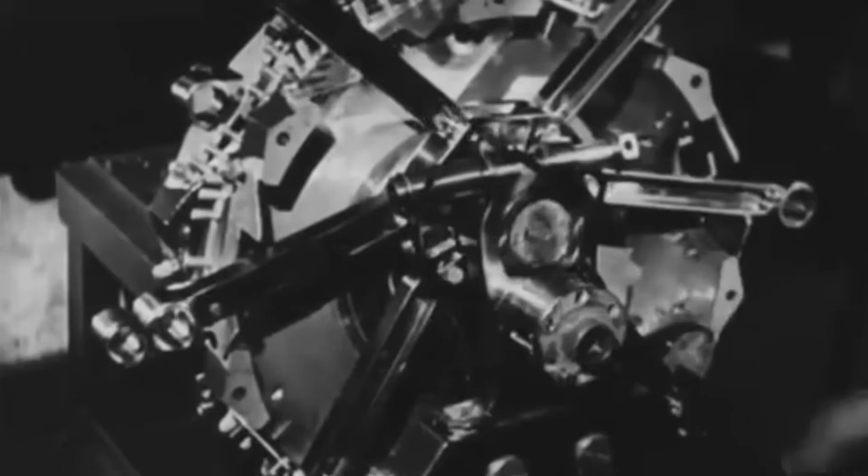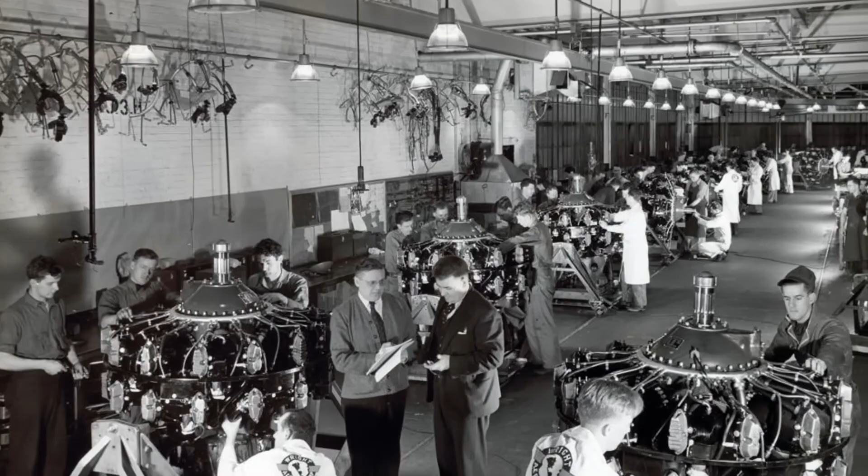In 1958, inside the massive Wright Aeronautical plant in Wood-Ridge, New Jersey, the most complex piston engine in American history was already obsolete. The Boeing 707 had just entered commercial service, tearing across the sky with Pratt & Whitney turbine engines. Down below, Wright was still casting and machining the R-3350 Duplex Cyclone, an 18-cylinder mechanical monster that had won a world war and powered the golden age of air travel.

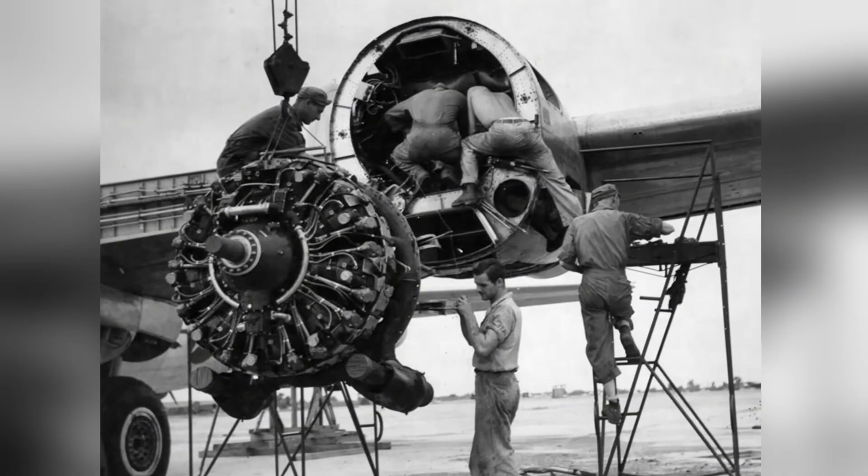A decade earlier, the roar of a Wright radial meant American strength. The R-3350 delivered thousands of horsepower, powering fleets of Lockheed Constellations and heavy bombers. But overnight, the rules of aviation changed. Airlines did not want thousands of moving parts, heavy oil consumption, and endless maintenance overhauls. They wanted the clean, smooth thrust of a jet.

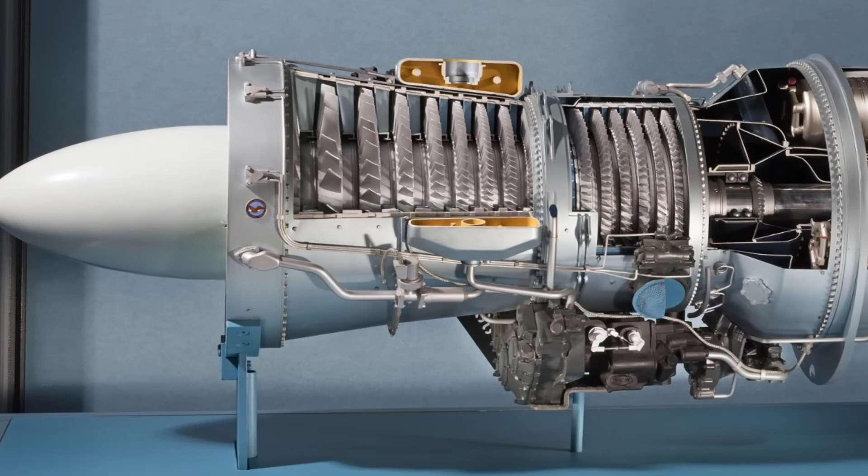Mechanics who had spent their lives mastering the grease and rhythm of radials suddenly inherited legacy equipment. The engine had not lost its power. It had simply lost the world that needed it. But the real story of Wright Aeronautical is not only the story of an engine line going quiet, it is the story of how an American empire pushed piston technology to its absolute breaking point, and what happened when the sky no longer needed that kind of power.

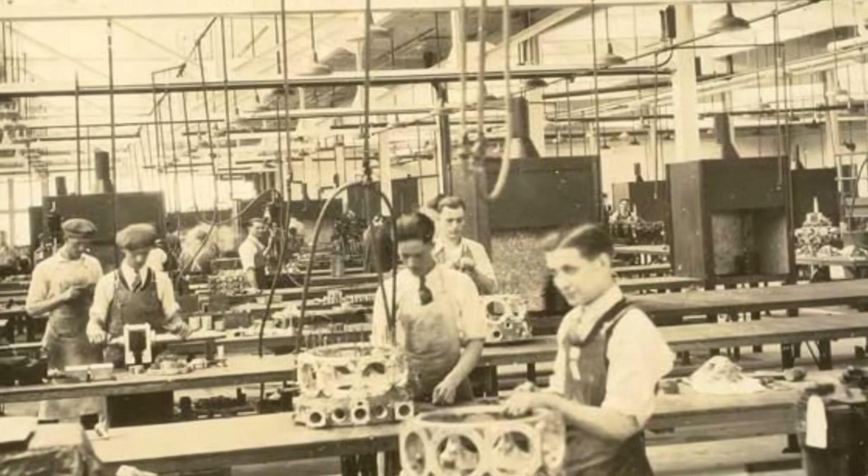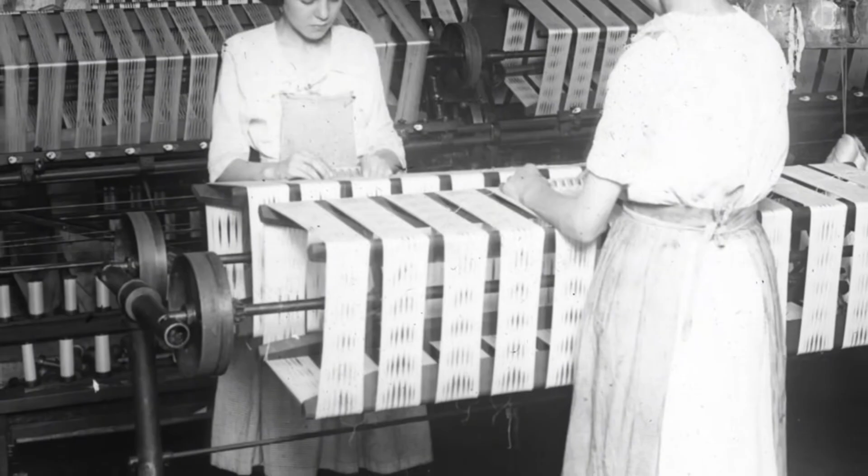Wright Aeronautical Corporation did not start as a giant. It began in the shadow of World War I, in a country that had not yet figured out what an airplane was actually for in peacetime. In the early 1920s, America did not have a commercial airline industry. It had the U.S. Airmail Service. The job was to move canvas bags of letters from New York to San Francisco. The pilots flew in open cockpits, navigating by following railroad tracks and bonfires lit in fields.

But the real enemy was not the weather or the dark. The real enemy was the engine. The standard aviation power plant of the era was the Liberty L-12. It was a massive, water-cooled V-12 engine that produced strong power, but required a fragile ecosystem to keep it alive. A water-cooled engine meant the aircraft had to carry a radiator, a water pump, and a network of rubber hoses and metal clamps. For an airmail pilot flying over the Allegheny Mountains in winter, water froze.

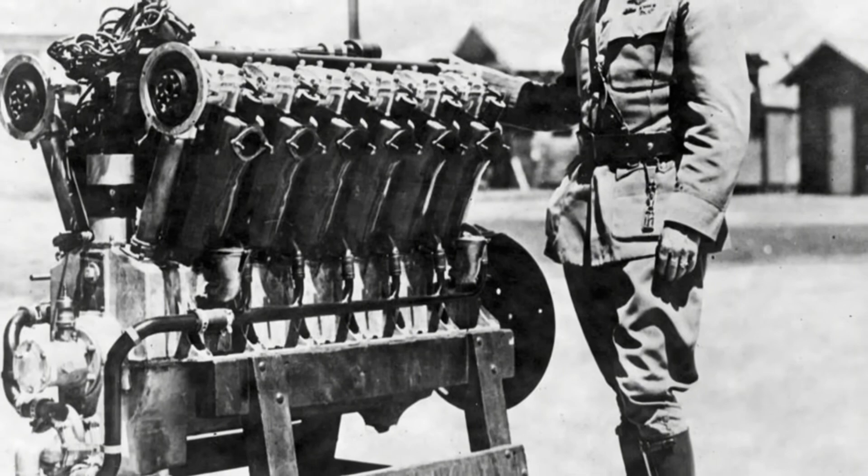Over the deserts of the American West in summer, water boiled. The vibration of a wooden airframe constantly shook the plumbing. If a hose clamp vibrated loose, the coolant leaked out, the engine overheated, seized into a block of dead metal, and the pilot had to put the plane down in a dark field. America needed an engine that used the medium it operated in, air, to keep itself alive.

The solution did not come entirely from Wright's internal engineering at first. It came from a man named Charles Lawrence, who had been obsessively developing an air-cooled radial engine. A radial engine, a piston aircraft engine with cylinders arranged in a circle around a central crankshaft, offered a mechanical elegance that water-cooled engines could not match.

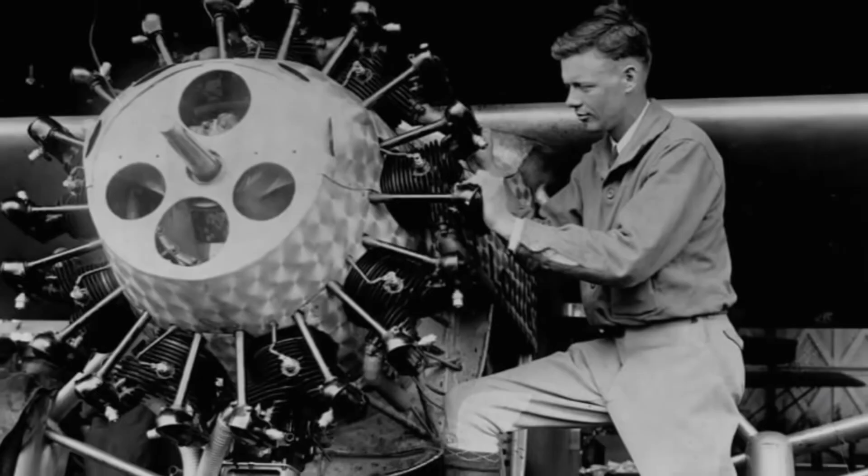By pointing the cylinders outward like the spokes of a wheel, every single cylinder was exposed directly to the slipstream of the propeller. The engine did not need a radiator. It did not need coolant hoses. It cooled itself simply by moving forward through the sky.

In 1923, pushed heavily by the U.S. Navy, which desperately wanted lighter, less complicated engines for its early aircraft carriers, Wright Aeronautical absorbed Lawrence's company. They took his rough designs, poured Wright's superior casting and machining capabilities into the blueprints, and engineered a machine that would rewrite the American expectation of flight. They called it the Wright J5 Whirlwind.

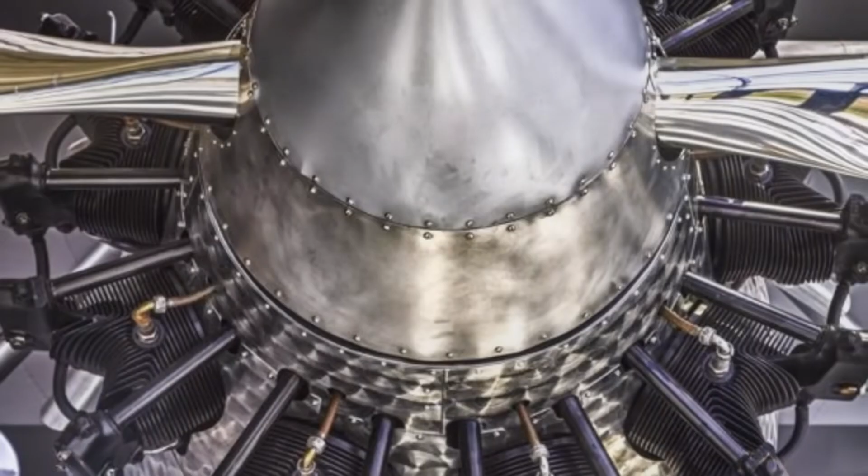Introduced in the mid-1920s, the J5 was a 9-cylinder, air-cooled radial engine. It had a displacement of 788 cubic inches, meaning the total volume swept by the pistons inside the 9 cylinders was massive compared to a standard automobile engine. Yet it was remarkably light. It produced 220 horsepower and sounded like a tearing sheet of canvas mixed with a deep, rhythmic hammering.

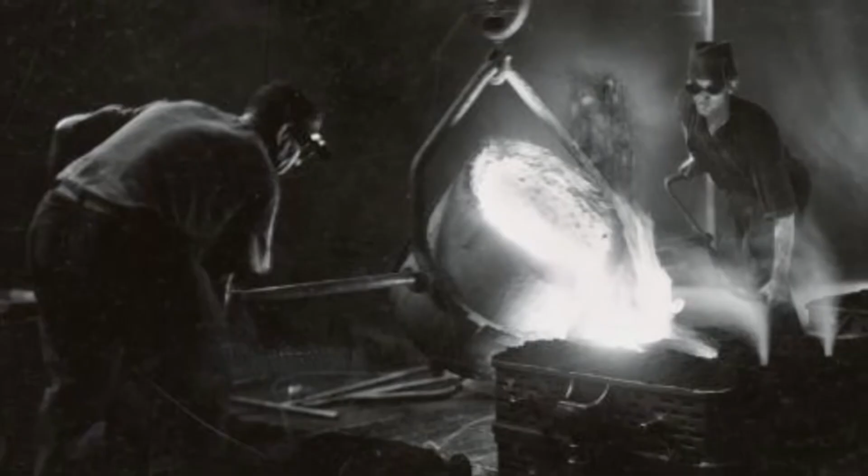To make the air-cooled concept work on a large scale, Wright engineers had to master metallurgy. The cylinder head, the upper part of the engine that helps seal the cylinders and contains the combustion passages, had to dissipate heat instantly. Wright cast the cylinder heads out of aluminum alloy and covered them in delicate, deeply machined cooling fins.

These fins increased the surface area of the metal, allowing the rushing air to pull the heat away from the combustion chamber before the metal could melt.

In the foundries of Paterson, pouring aluminum for aviation use was a dark art. Machinists who had spent their lives cutting heavy iron for railroad equipment had to learn the delicate tolerances of aerospace alloys. A single flaw in a casting meant a cylinder head could crack at 5,000 feet. The Wright factory floor became a place of obsessive measurement, where engine blocks were subjected to rigorous run-in tests before they ever saw an airframe.

Out in the field, a new service network was being born. The Wright Aeronautical Service manuals, grease-stained books passed around the American hangar network, taught a generation of farm boys turned aircraft mechanics how to set the valve lash on a 9-cylinder radial. They learned the exact sound of a J5 running rich, the smell of aviation oil burning off a hot cylinder fin, and the ritual of manually pulling the propeller through before a cold start to clear oil from the bottom cylinders. The engine was building not just a company, but an entire American mechanical culture.

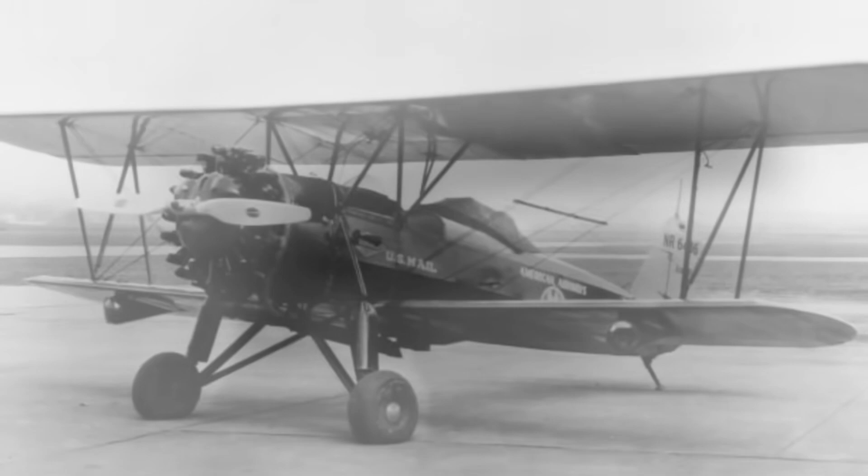The ultimate proof of this mechanical trust occurred in May 1927. A young, unknown airmail pilot named Charles Lindbergh was preparing to attempt a solo, non-stop flight from New York to Paris. When he commissioned a custom Ryan monoplane for the crossing, he had one absolute requirement. It had to be powered by a single Wright J5 Whirlwind. Lindbergh chose a single engine instead of a multi-engine layout because he believed in the math of the J5. He calculated that adding more engines only increased the statistical probability of a plumbing or mechanical failure. He trusted the Wright radial to run continuously for over 30 hours.

When the Spirit of St. Louis lifted off a muddy runway in Long Island, New York, the J5 was pulling a massive overload of fuel. For 33 and a half hours, the 9 pistons hammered inside their cylinders. The crankshaft spun the propeller through rain, ice, and darkness over the Atlantic. The engine never coughed. It never overheated. It simply did what it was machined to do.

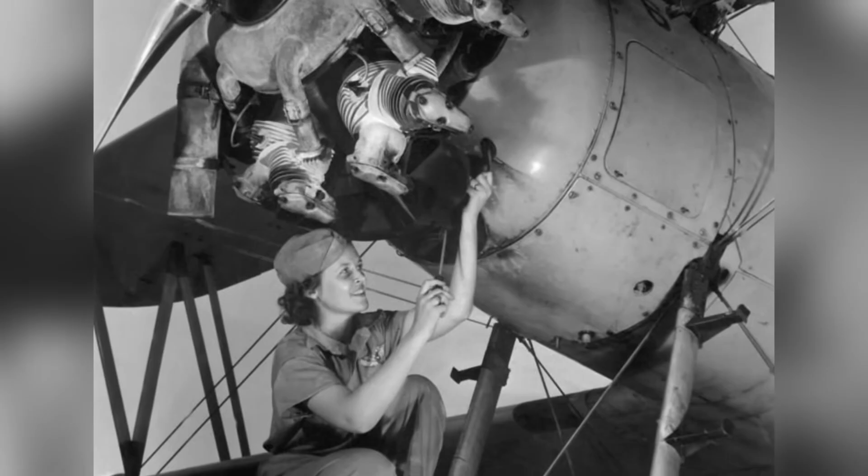Lindbergh's flight ignited an aviation boom in America. But in the boardrooms and factory floors in Paterson, New Jersey, the flight meant something far more specific. It meant the air-cooled radial engine had won. It was no longer an experimental alternative. It was the absolute baseline of modern aviation. The Whirlwind had proved that a radial engine could cross an ocean. The next question was whether a larger version could power an entire industry.

The J5 Whirlwind was only the beginning. To power a true commercial aviation industry, Wright needed a machine that could carry more passengers, more freight, and heavier military payloads. In 1929, Wright Aeronautical merged with the Curtiss Aeroplane and Motor Company to form Curtiss-Wright, creating an aerospace manufacturing giant with the capital to build larger foundries and fund aggressive engineering. The result was the Wright Cyclone family, and its definitive masterpiece was the R-1820 Cyclone 9.

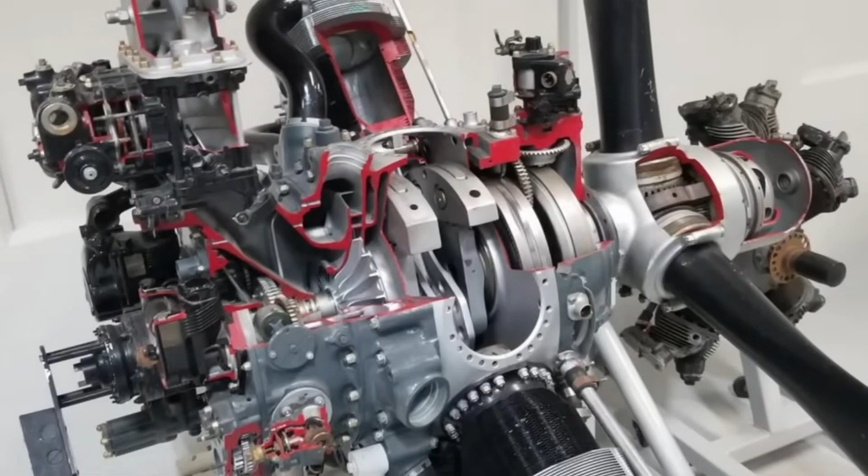Introduced in the early 1930s, the R-1820 was a massive 9-cylinder engine. The 1820 stood for its displacement, the total volume swept by the pistons inside the cylinders, measuring an immense 1,820 cubic inches. For context, a modern heavy-duty American pickup truck might have a displacement of 400 cubic inches. Wright was asking 9 massive pistons to hammer back and forth inside an air-cooled aluminum and steel block, producing up to 1,000 horsepower, and eventually up to 1,225 horsepower in later military variants.

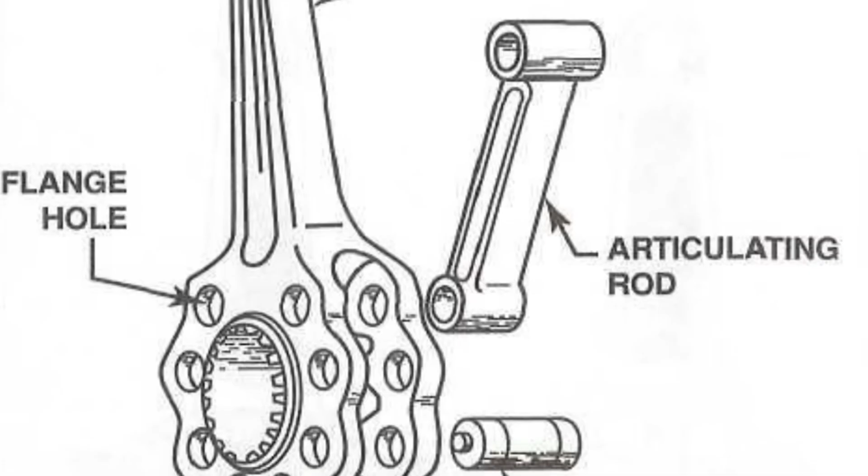Building an engine of this scale required mastering a unique mechanical layout. In a standard automotive V8, every connecting rod, the part that links the piston to the crankshaft, attaches directly to the crankshaft along its length. But a radial engine, a piston aircraft engine with cylinders arranged in a circle around the central crankshaft, has only one single crank pin. To solve this, Wright engineers used a master rod assembly, one massive, heavily machined main connecting rod attached to the crankshaft, and the other 8 rods pinned directly into the sides of that master rod.

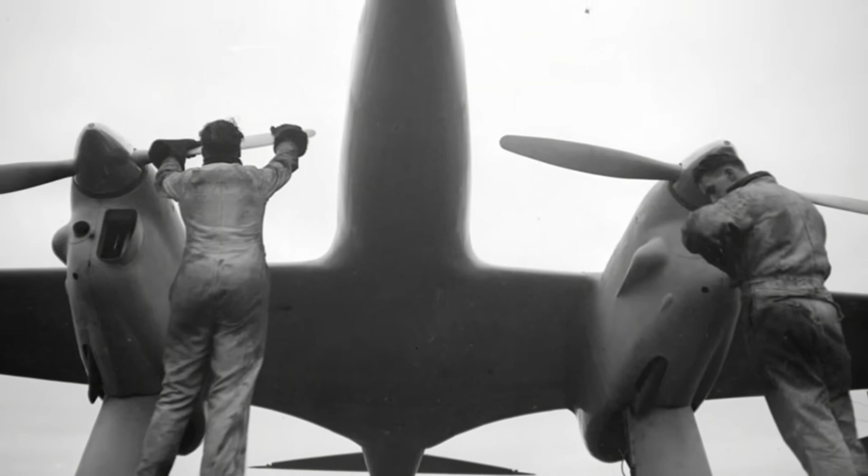This created a compact, short engine block that saved tremendous weight, but it also created a very specific culture on the American tarmac. Because the cylinders pointed outward in a full circle, the bottom cylinders hung upside down. When a Wright Cyclone sat idle overnight on a ramp in Chicago or Kansas City, aviation oil would seep past the piston rings and pool in the lower cylinder heads. If a pilot simply hit the starter button the next morning, the engine could suffer a hydraulic lock, the piston trying to compress incompressible oil, bending the connecting rod and destroying the engine instantly.

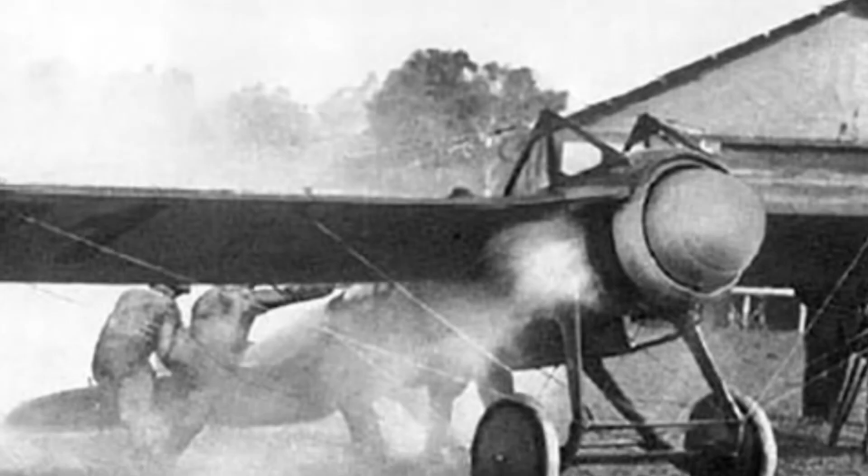To prevent this, American aviation developed a daily ritual. Before the ignition was ever turned on, mechanics or pilots had to walk up to the massive metal propeller and manually pull it through a few rotations by hand. This forced the pooled oil out of the open exhaust valves.

Only then would the mechanic step back and the pilot engage the starter. The engine would cough, blow a thick cloud of blue smoke across the ramp, and settle into a deep, uneven, rattling idle that shook the entire airframe until the cylinders warmed up and expanded into their proper tolerances.

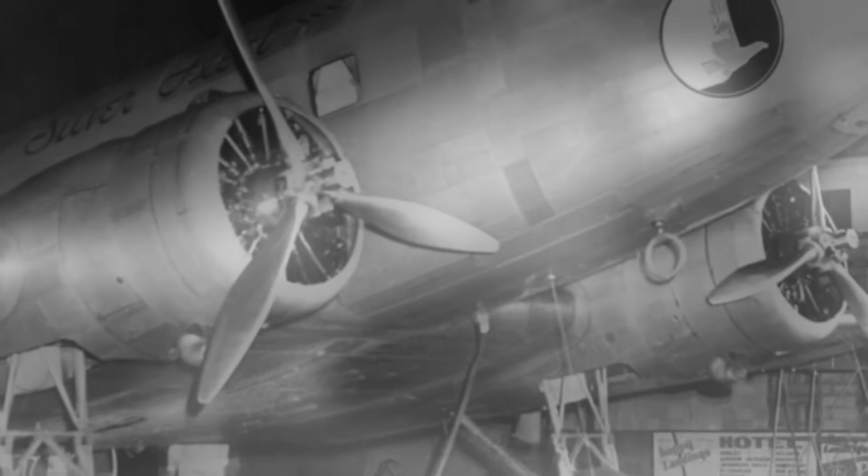The Cyclone did not just pull airplanes off the ground, it pulled them into higher, thinner air. To fly over the Rocky Mountains or avoid violent Midwestern thunderstorms, airplanes needed a supercharger, a mechanically driven compressor wheel that forces more air into the engine. Without it, a naturally aspirated engine would choke at high altitudes where oxygen is thin. Wright integrated a high-speed supercharger into the rear of the R-1820 block.

As a Douglas DC-2 climbed out of Newark, New Jersey, the supercharger spun at thousands of revolutions per minute, feeding a densely packed mixture of fuel and air through the carburetor, a device that mixes fuel and air before it enters the engine, ensuring the engine maintained its horsepower at 10,000 feet.

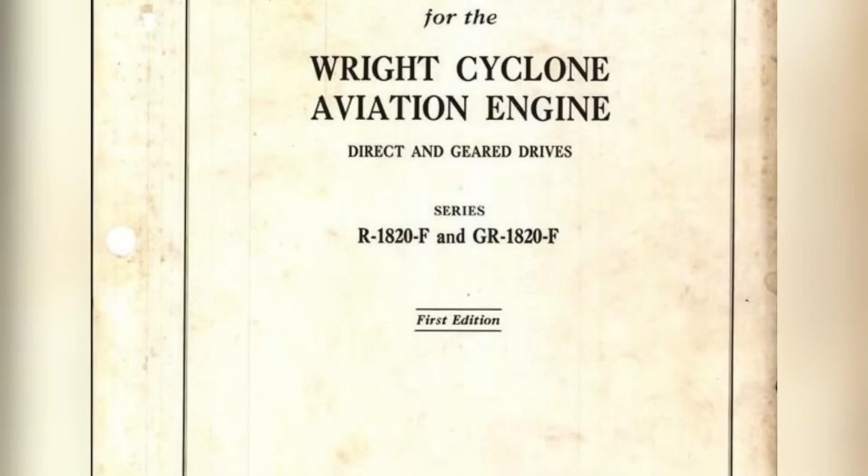The engine reached Americans through a rapidly expanding service network. A Wright Cyclone was not a machine you ran until it broke. It operated on a strict schedule of preventative maintenance. The Wright service manuals, bound in heavy paper and soon stained with grease, dictated exact intervals for an overhaul, a major service process where an engine is taken completely apart, measured with micrometers, inspected for microscopic cracks, and rebuilt to factory operating standards.

In hangars across the country, mechanics learned the specific metallurgy of Wright cylinders. They learned how to read spark plugs for signs of a failing fuel mixture, how to adjust valve clearances, and how to safety wire every critical nut and bolt so engine vibration would not shake the power plant apart in midair. This was a blue-collar mechanical force, thousands of young men who translated the high-level engineering of the Paterson factory into physical reliability on the flight line.

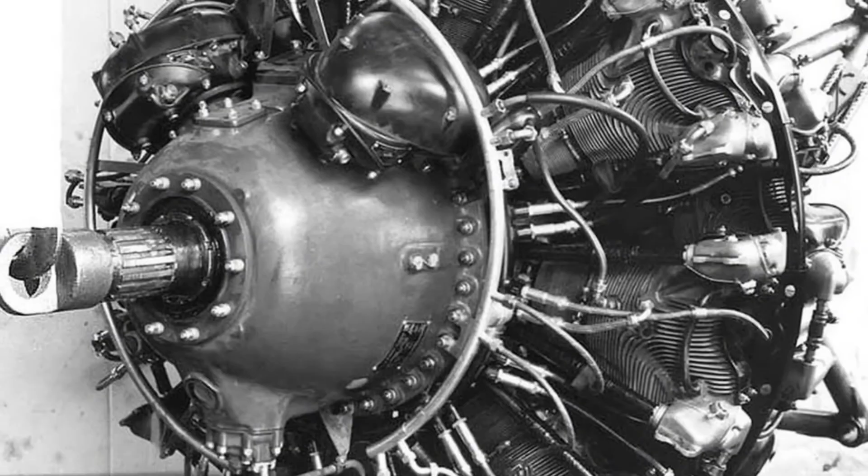The R-1820 became the backbone of both American commercial and military aviation. While its great rival, the Pratt & Whitney Wasp series, fought for dominance in the commercial transport market, the Wright Cyclone secured legendary contracts. The engine powered early airliners like the Douglas DC-2, helping to establish the very concept of a profitable passenger route. But the Cyclone's most famous application was strictly military.

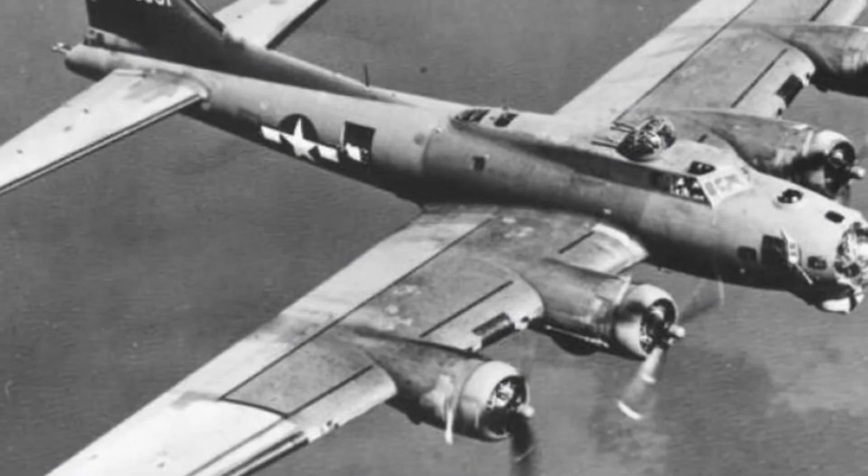When the Boeing B-17 Flying Fortress took shape in the late 1930s, the U.S. Army Air Corps chose the Wright R-1820 to power it. Every single B-17 built for World War II carried 4 Wright Cyclones on its wings. During the war, the demand for the engine was so high that Curtiss Wright could not build them fast enough. The U.S. government had to contract automotive companies, including Studebaker, to build Wright R-1820s under license, turning Midwestern automotive assembly lines into aerospace foundries.

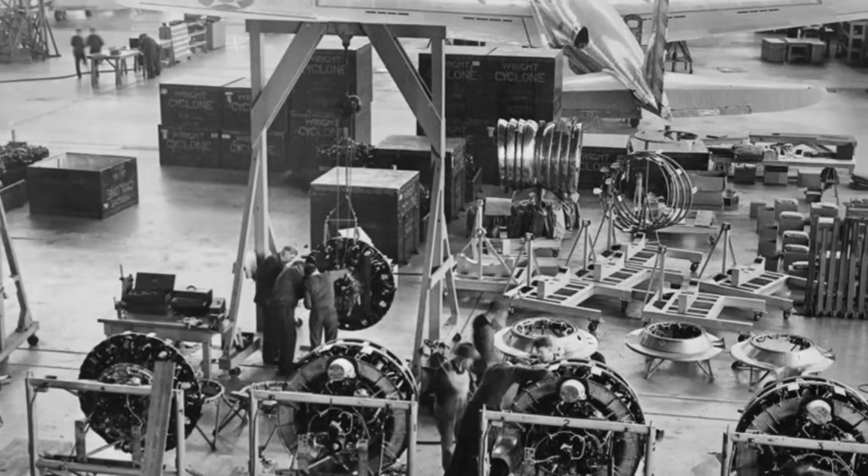By the early 1940s, the 9-cylinder Wright Cyclone was producing reliable mass-scale power. It had taught a generation of American mechanics how to maintain an aviation fleet, and it had proved that an air-cooled radial engine could sustain a global war effort. The Cyclone family had given American aviation its mechanical heartbeat. But as airplanes grew heavier and distances stretched farther, the market demanded a scale of power that would push the radial engine to the very edge of physical law.

By 1942, the limits of the 9-cylinder radial engine had been reached. To lift heavier bombers and eventually transcontinental airliners, Curtiss Wright could not simply make the cylinders larger. The physical limits of metallurgy and cooling air dictated a different solution. They had to stack them. The result was the Wright R-3350 duplex Cyclone. It was a twin-row radial engine, meaning it had 2 banks of 9 cylinders, one positioned directly behind the other, spinning a single massive crankshaft.

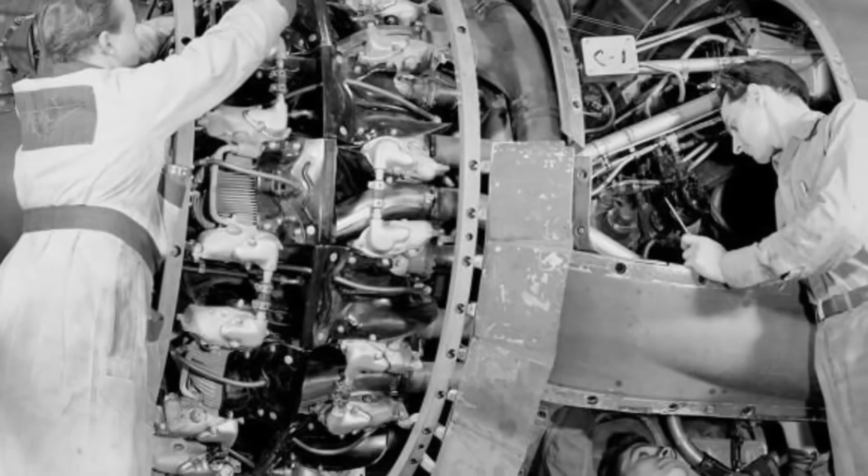The displacement jumped to a staggering 3,350 cubic inches. Early military variants produced 2,200 horsepower. Later commercial versions would push well past 3,400 horsepower. To build an engine of this unprecedented density, Wright Aeronautical needed an industrial footprint that matched the machine. They constructed a sprawling, multi-million square foot factory in Wood-Ridge, New Jersey.

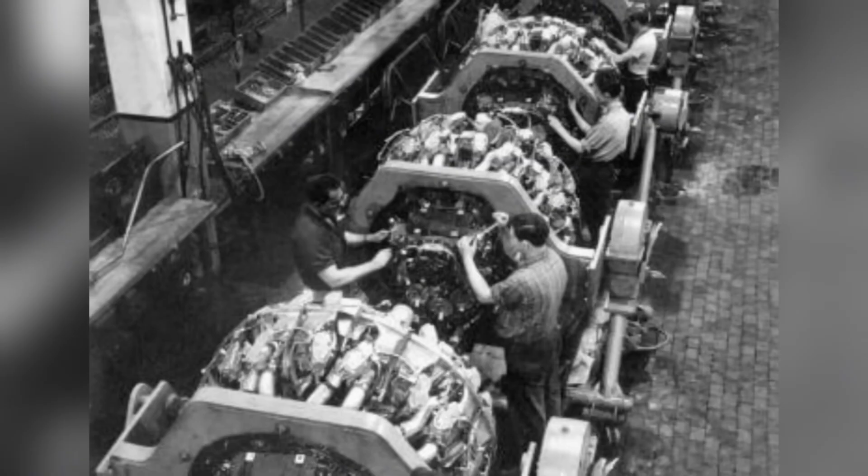This was not a small machine shop. Wood-Ridge became a self-contained aerospace city. It had its own foundries, its own heat-treating ovens, and endless rows of lathes where thousands of machinists turned raw steel and aluminum into high-tolerance engine blocks. Inside the test cells at Wood-Ridge, the sound of an R-3350 running at full throttle was a physical force. It shook the concrete floors. It vibrated in the chests of the engineers.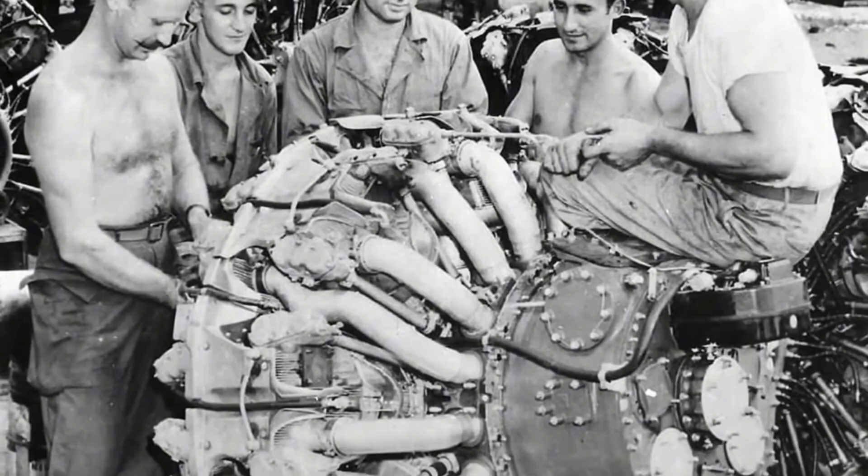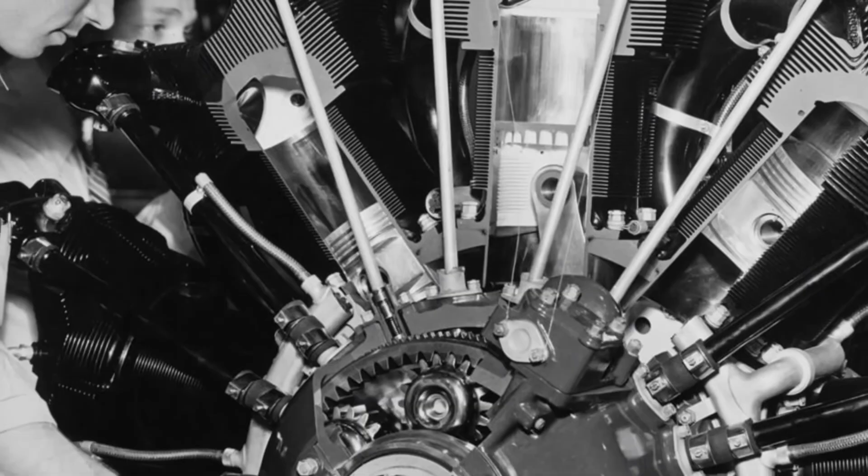Inside the engine case, the mechanical ballet was almost incomprehensible. There were 18 massive pistons, 36 spark plugs, 36 valves, and thousands of gears, springs, and bearings all moving simultaneously in a space barely 5 feet across. The engine drank high-octane aviation fuel at a rate that required massive wing tanks, and it consumed heavy aviation oil by the gallon just to keep its internal friction from melting the block.

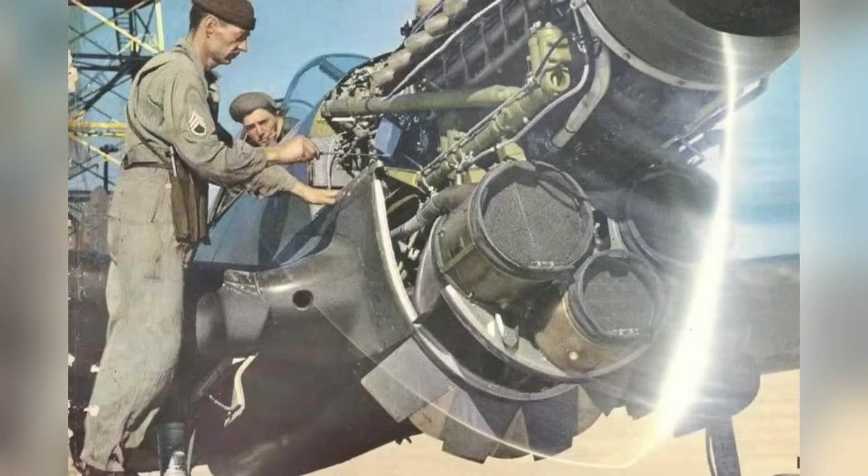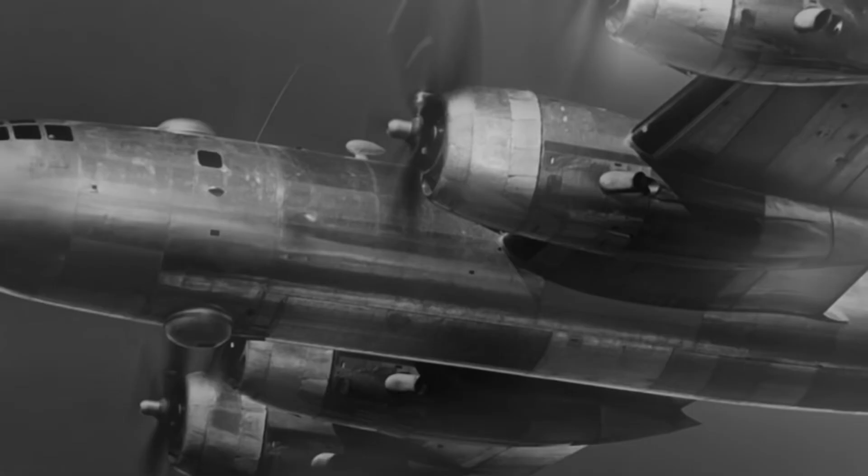In an America where an engine could decide whether a field was cut, a truck made its delivery, a boat left the dock, a generator carried a hospital through a storm, or a plane lifted from the runway, power was not an abstraction. It was iron, fuel, labor, heat, sound, repair, and trust. The R-3350 was the ultimate expression of that trust, but it was also a terrifying piece of engineering.

Because the engine was air-cooled, the front row of cylinders received the direct blast of the slipstream, but the rear row sat directly in the hot aerodynamic shadow of the front row. Wright engineers had to design elaborate, tightly cowled metal baffles to force high-velocity air down through the deeply machined cooling fins of the rear cylinders. If the airflow was disrupted for even a few minutes, the engine would devour itself in its own heat.

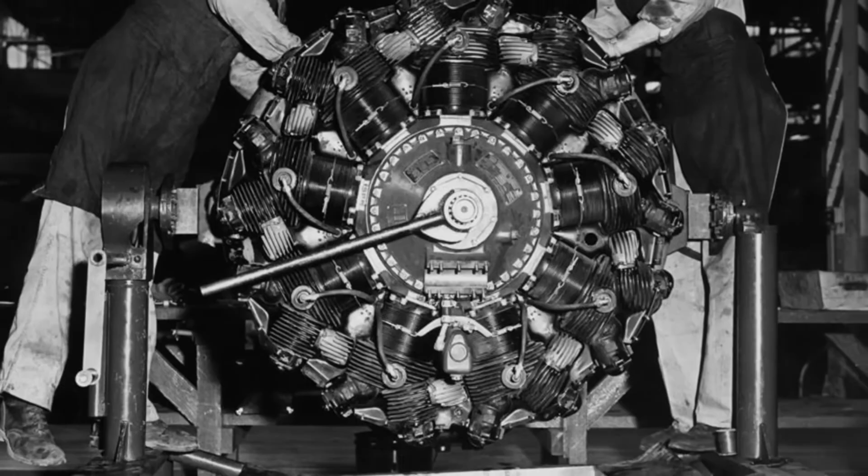When the R-3350 was strapped to the wings of the Boeing B-29 Superfortress during World War II, it created a mechanical crisis. The bomber was rushed into combat service before the engine was fully matured. On the baking tarmac of airfields in the Pacific, the Duplex Cyclone struggled to keep itself cool on the ground. If a pilot idled too long before takeoff, the rear row of cylinders would overheat. The magnesium engine components could ignite, and the wing could burn before the plane ever left the Earth.

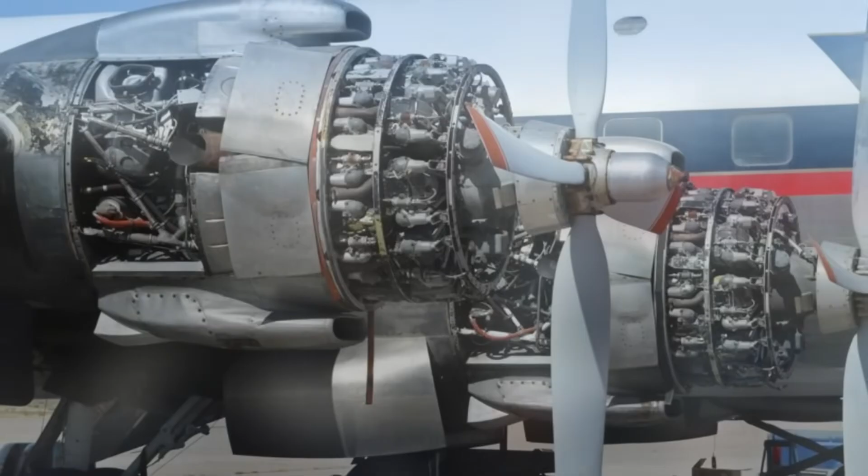Yet, despite the wartime fires and the brutal maintenance schedule, Wright Aeronautical pushed through the engineering bottlenecks. Mechanics learned how to nurse the engine on the flight line. Engineers redesigned the cooling fins, upgraded the valve materials, and refined the fuel delivery systems. By the time the war ended, the R-3350 was no longer just a military weapon. It was a machine that had been tested in the most unforgiving environments on Earth, and it was ready to dominate the post-war sky.

In the late 1940s and early 1950s, the American commercial airline industry exploded. Airlines like TWA, American, and Pan Am wanted to fly non-stop from New York to California and eventually across the Atlantic without refueling. To do this, they needed an engine that could deliver unprecedented speed and fuel economy. Curtiss-Wright could not simply add more cylinders. The 18-cylinder block was already at the edge of physical reality. Instead, Wright engineers decided to capture the only energy the engine was wasting: the exhaust.

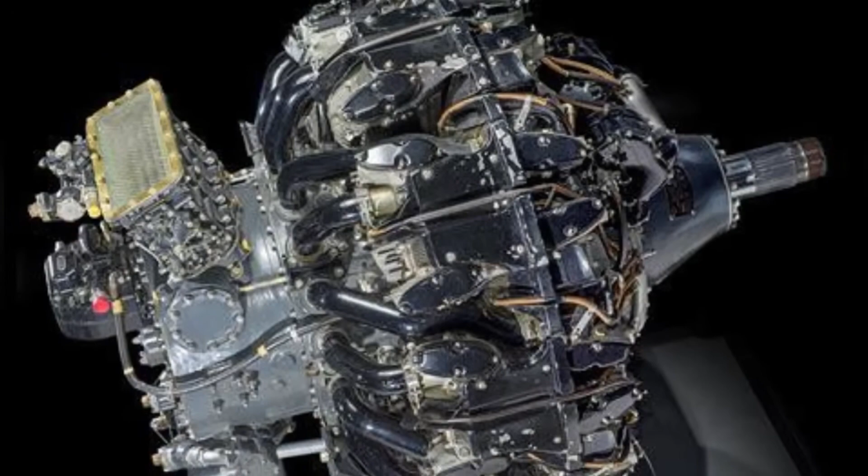The result was the Wright R-3350 Turbo Compound. It remains one of the most complex piston engines ever put into mass production. Wright attached 3 power recovery turbines, or PRTs, to the rear of the engine. A standard turbocharger uses exhaust gas to compress incoming air, but a PRT did something fundamentally different. It routed the white-hot, high-velocity exhaust gases leaving the cylinders through 3 small turbine wheels. As the exhaust blasted through and spun these turbines at massive speeds, fluid couplings geared that rotational energy directly back into the main engine crankshaft.

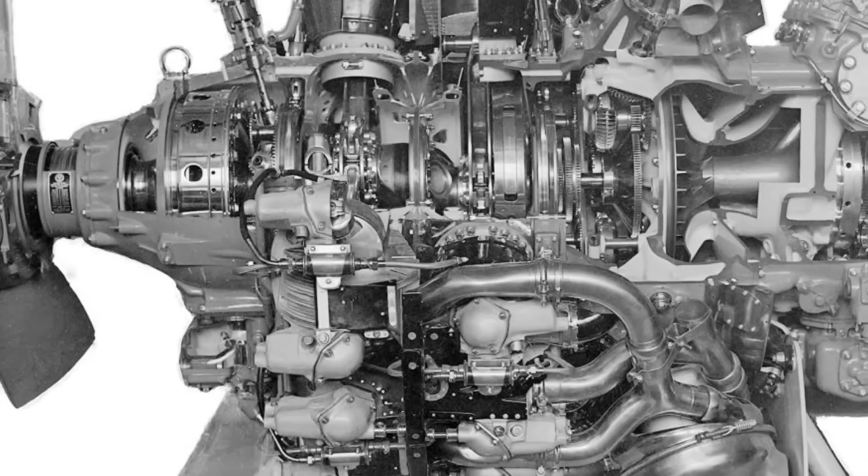It was a mechanical masterpiece. The PRTs recovered energy that would have been lost to the atmosphere, feeding it back into the driveline to add up to 600 free horsepower without burning a single extra drop of aviation fuel. With a turbo compound system, the R-3350 pushed past 3,400 horsepower. It became the engine of choice for the ultimate generation of piston-powered airliners, the Lockheed Super Constellation and the Douglas DC-7. These were the aircraft that inaugurated non-stop transcontinental American air travel.

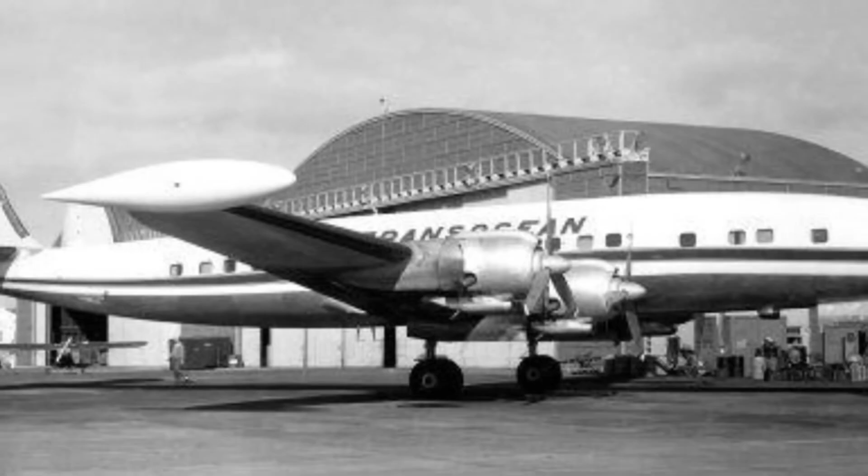To see a turbo compound Constellation take off at night from Los Angeles International Airport was to witness the absolute zenith of the internal combustion engine. The PRTs blasted a continuous bright blue flame from the exhaust stacks, a visual signature of raw mechanical force tearing through the sky. Inside the cabin, passengers flew in pressurized, vibration-dampened comfort. But down on the tarmac, the engine was a terrifying beast to maintain.

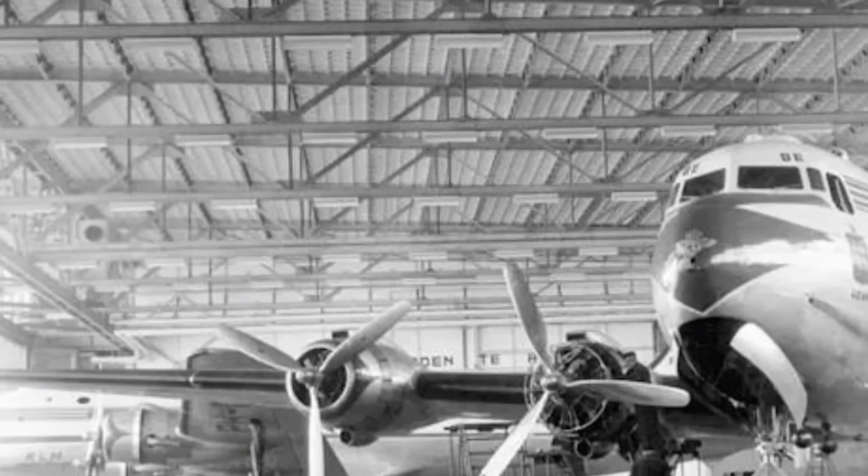The sheer mechanical density of the turbo compound was staggering. The PRT spun at up to 19,000 revolutions per minute, bathed in exhaust gases that exceeded 1,500 degrees Fahrenheit. If a turbine blade failed under that intense heat and centrifugal stress, it could shatter, sending shrapnel slicing through the aluminum engine cowling or severing an oil line. In the maintenance hangars at Idlewild Airport in New York, mechanics developed a dark sense of humor about the engine's fragility. They sarcastically referred to the PRTs as parts recovery turbines.

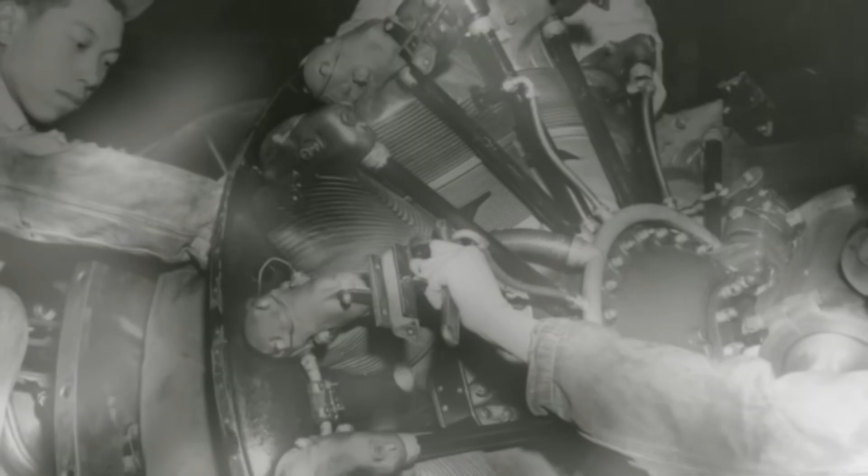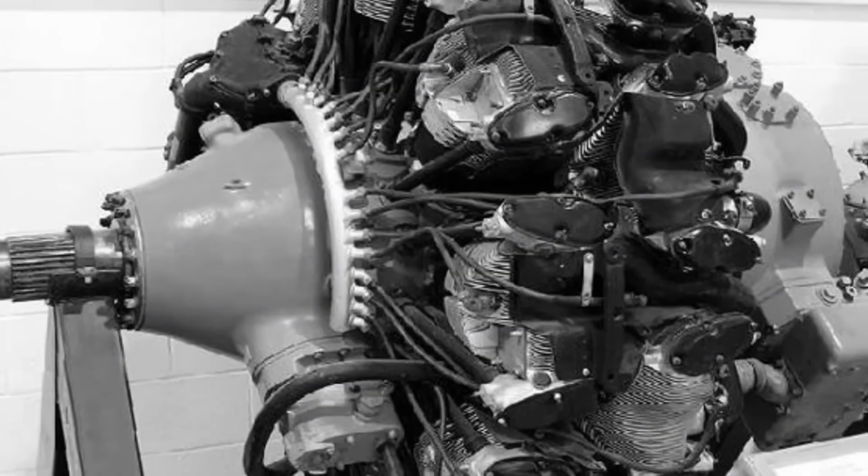Every spark plug, every valve clearance, and every fluid coupling had to be perfectly calibrated. A single Wright R-3350 now had 18 massive pistons, 2 supercharger speeds, 3 power recovery turbines, and thousands of highly stressed moving parts operating in a constant state of extreme heat and vibration. The foundries in Wood-Ridge were casting the strongest aerospace alloys known to man, but it was barely enough to keep the engines from tearing themselves apart under continuous commercial load. The engines leaked oil so profusely that mechanics joked a Wright radial was only out of oil when it stopped dripping on the ramp. The Wright Duplex Cyclone had achieved what engineers once thought impossible.

But that exact mechanical density, the thousands of moving parts required to create that kind of power, was about to become its ultimate trap. The fall of the Wright radial engine empire did not begin with a factory closure or bankruptcy. It began with a small, quiet crisis inside the maintenance logbooks of the American airline industry.

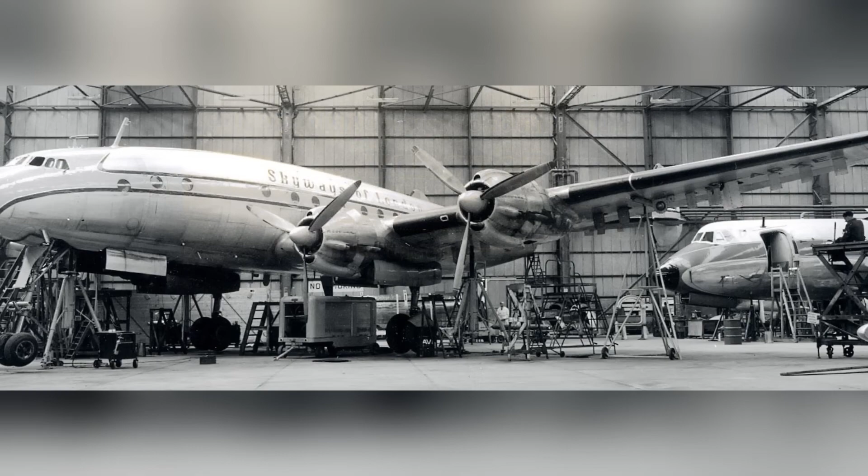By the mid-1950s, at airports like Idlewild in New York and Midway in Chicago, the ground crews servicing the Douglas DC-7 and the Lockheed Super Constellation were exhausted. The Wright R3350 turbo compound was a mechanical marvel, but it had pushed the internal combustion engine past the limits of practical maintenance. The first crack in the empire was not a lack of power. It was the sheer crushing cost of keeping that power reliable.

An airplane only makes money for an airline when it is in the air. But the R3350 demanded constant attention on the ground. A 4-engine Super Constellation had 72 cylinders, 144 spark plugs, and 144 valves. Because the engines ran so hot and under such extreme cylinder pressure, spark plugs fouled constantly, valves burned.

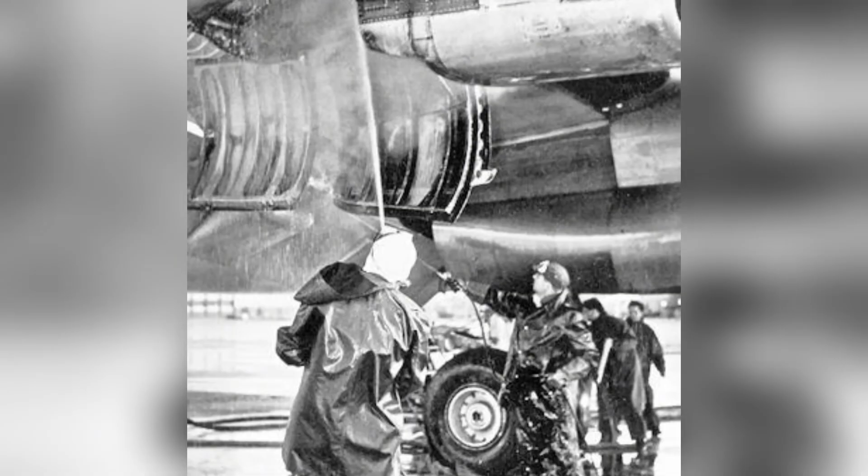The power recovery turbines, the exhaust-driven wheels that gave the engine its massive horsepower, were subjected to such violent heat cycles that they required intense ongoing inspection to ensure a turbine blade did not shatter and slice through the engine cowling. In the hangars, mechanics were working around the clock.

The overhaul intervals, the required time frame before an engine had to be removed, completely disassembled and rebuilt, were stubbornly short. The engine was burning oil at an astonishing rate, sometimes up to 2 gallons an hour per engine, requiring massive oil tanks just to complete a transcontinental flight.

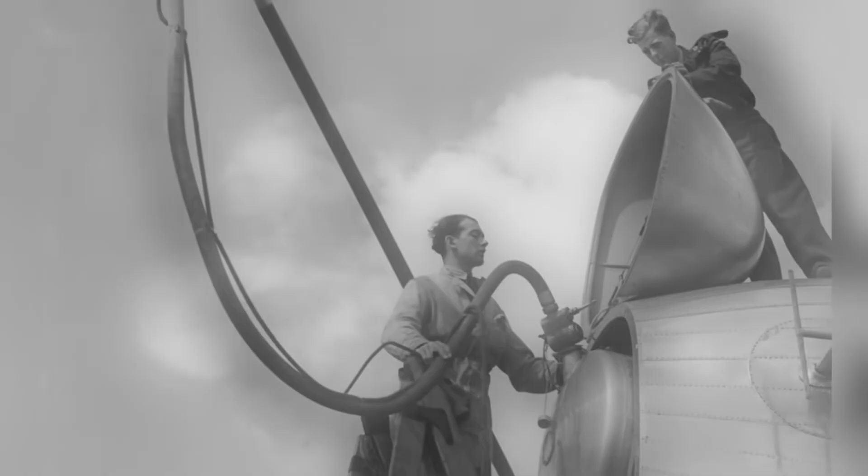The math for airline executives began to shift. The engine still ran, and the passengers loved the speed, but the fleets were spending a fortune on parts, labor, and downtime. The American aviation industry had hit a mechanical wall. You could not simply build a larger piston engine. The R3350, with its 3,347 cubic inches of displacement and massive rotating mass, was already vibrating at the absolute threshold of what an airframe could withstand.

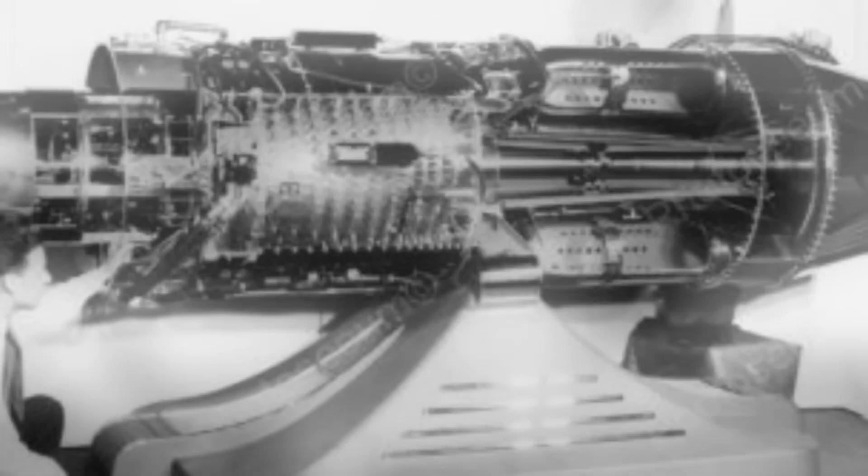Pistons stopping, reversing direction, and firing thousands of times a minute created violent reciprocating forces. To go faster, to fly higher, and to carry more passengers, aviation needed an engine that did not shake itself apart. The answer was already waiting on military tarmac. The turbine engine, an engine that uses spinning turbine stages and high-speed gas flow to produce power or thrust, rather than reciprocating pistons, fundamentally changed the rules of mechanical friction.

A jet engine only had one primary moving system, the central spool that sucked air in, compressed it, mixed it with fuel, ignited it, and blew it out the back. There were no pistons. There were no valves to adjust. There was no massive connecting rod trying to punch through the side of an aluminum block. A turbine engine simply spun smoothly in one continuous direction.

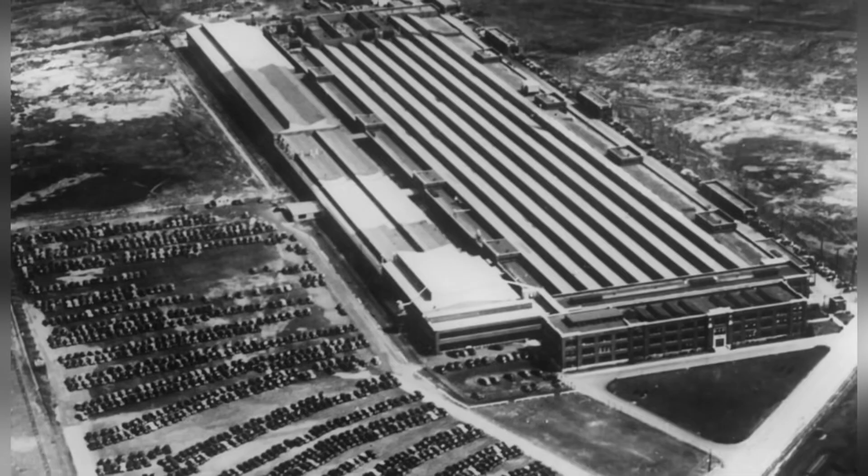Curtiss Wright understood that the jet age was coming, but the massive corporation made a catastrophic strategic calculation. Developing a large-scale commercial jet engine from a blank sheet of paper required a staggering investment in research, metallurgy, and testing. The management at Curtiss Wright, led by President Roy Hurley, decided to prioritize immediate profits over long-term engineering gambles. Instead of designing a homegrown American turbine to dominate the new era, they chose to buy their way in.

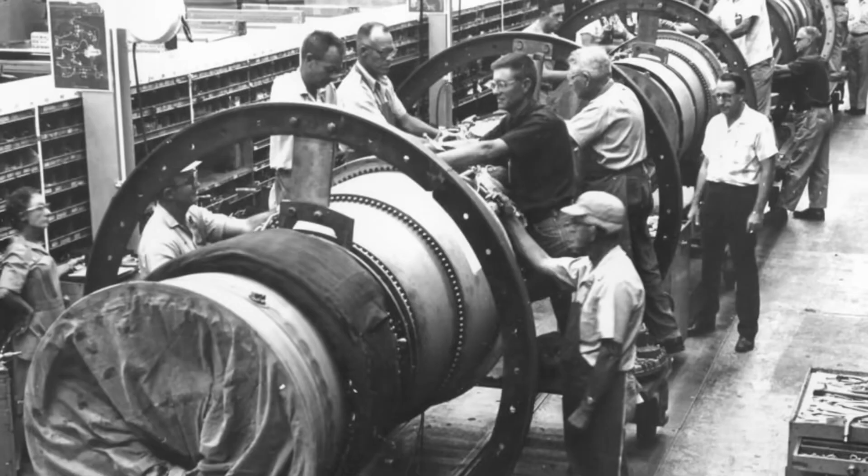Curtiss Wright purchased licenses to build British jet engines designed by Armstrong Siddeley and Bristol. They brought the British designs to New Jersey, modified them for American manufacturing, and produced engines like the Wright J65. For a brief moment, the strategy seemed to work. The J65 was a solid military turbojet. It powered American fighters and attack aircraft like the Republic F-84F Thunderstreak and the Douglas A-4 Skyhawk.

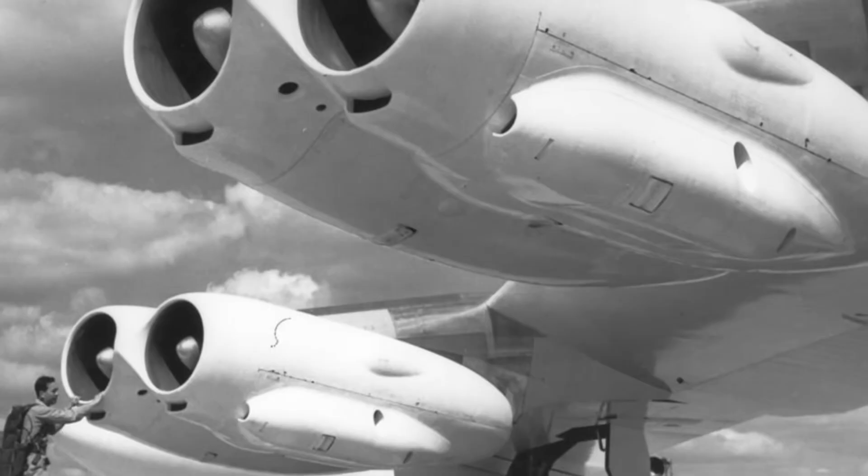But building a licensed military engine was not the same as commanding the future of American commercial air travel. While Wright was modifying British designs and trying to squeeze the last drops of horsepower out of the R-3350 piston lines, their greatest American rival was taking a massive bet-the-company risk. Pratt & Whitney poured millions of dollars into developing the J57, a dual-compressor jet engine that offered unprecedented thrust and fuel efficiency. The market was waiting for a winner, and the verdict came down in 1955.

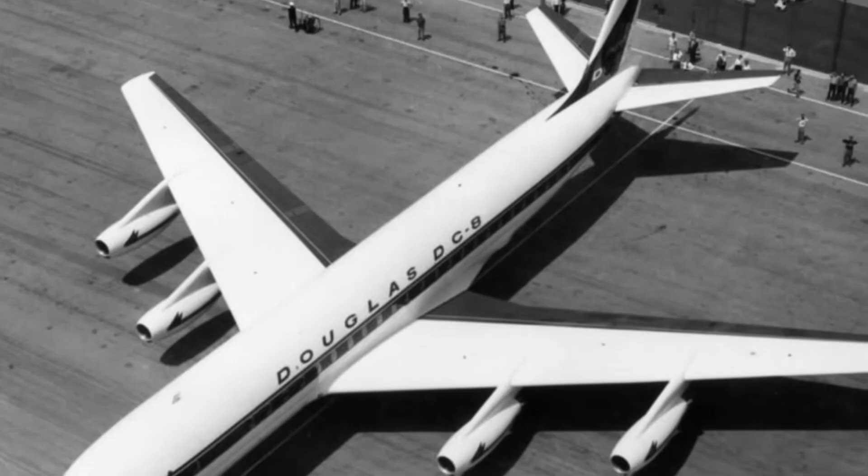Pan American World Airways placed a massive history-making order for the first generation of American commercial jetliners, the Boeing 707 and the Douglas DC-8. When the contracts were signed, the engines hanging off the swept wings of the new jets were not built by Curtiss Wright. They were built by Pratt & Whitney. The shock wave hit the Wood-Ridge factory almost immediately. The airlines were no longer buying horsepower. They were buying utilization, simplicity, and turbine speed. And the mighty American piston engine had just run out of time.

The shift was brutal and immediate. When the Boeing 707 and Douglas DC-8 entered service in the late 1950s, they did not just offer a new way to fly, they offered a fundamentally different economic reality for the American airline industry.

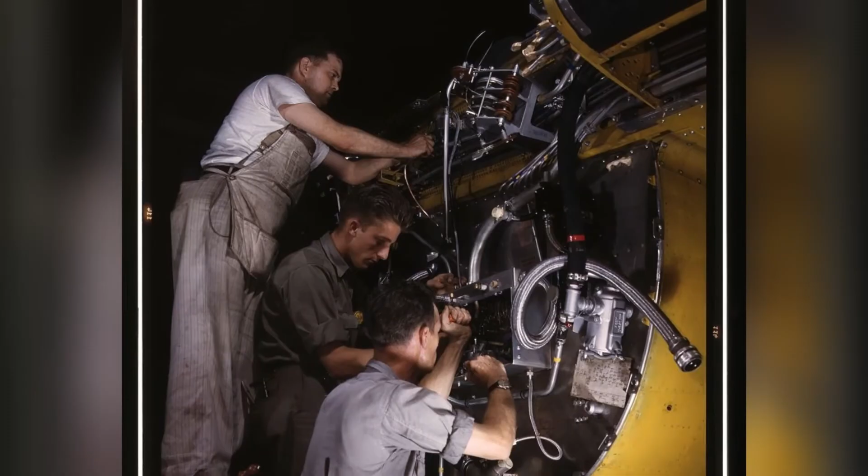A Pratt & Whitney turbine engine cost more upfront, but it could stay on the wing for thousands of hours without an overhaul. It burned jet fuel, which was cheaper than high-octane aviation gasoline. It did not foul spark plugs. It did not require a mechanic to manually pull the propeller through on a freezing morning in Chicago just to clear pooled oil from the bottom cylinders.

For Curtiss Wright, the rapid adoption of the turbine engine was an industrial catastrophe. The massive Wood-Ridge facility in New Jersey had been optimized for one specific task: machining, casting, and assembling the most complex piston engines on Earth. Wood-Ridge was a city of lathes, heat-treating ovens, and engine test cells. But you could not simply retool a radial engine foundry to cast turbine blades overnight. The metallurgy, the tolerances, and the supply chains were entirely different.

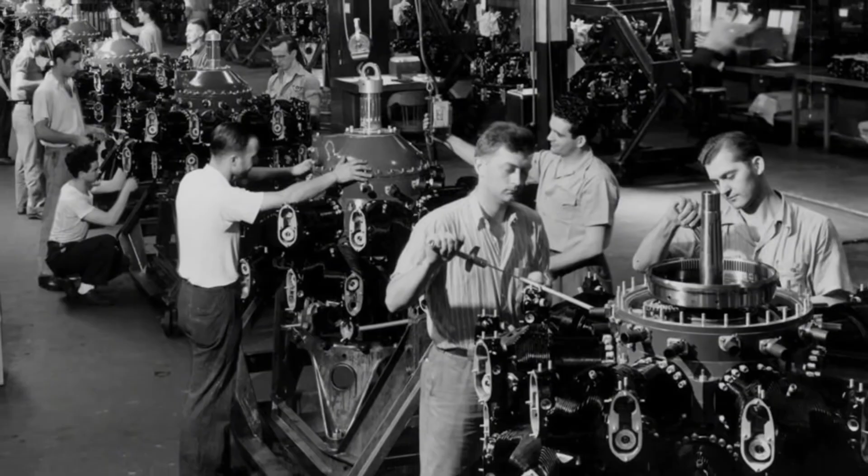As the 1960s began, the major American airlines began aggressively retiring their piston fleets. The Lockheed Constellations and Douglas DC-7s, airplanes that were only a few years old and represented the absolute pinnacle of propeller-driven passenger aviation, were suddenly pushed out of the premier terminals. They were relegated to secondary routes and quickly to the cargo market.

This was the quiet, grinding afterlife of the Wright R-3350. The engines that had once carried Hollywood executives across the continent were now flying late-night freight out of Miami, or hauling heavy machinery across the Alaskan wilderness. In this secondary market, the engines were pushed to the breaking point by operators who did not have the deep maintenance budgets of Pan Am or TWA. The power recovery turbines, the delicate exhaust-driven wheels that required constant factory-level calibration, were often run until they failed.

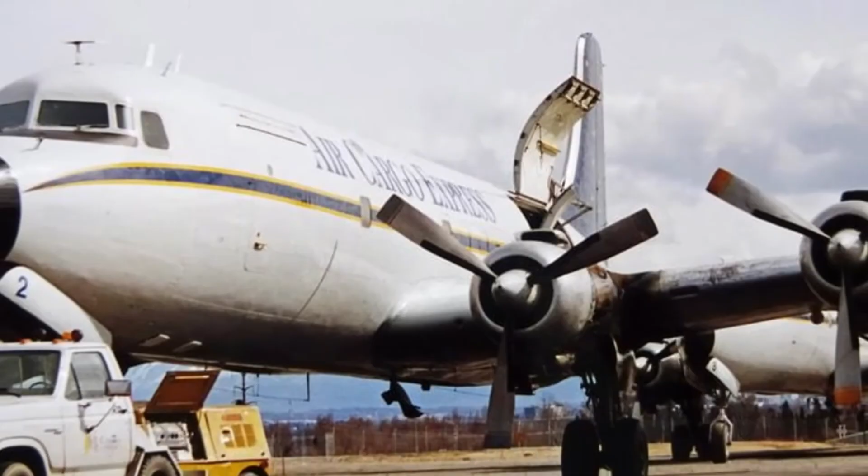Down on the tarmac, the service network fractured. The thousands of mechanics who had spent their careers mastering the Wright Cyclone family found themselves facing a new reality. The deep, rhythmic vibration of the radial engine was being replaced by the high-pitched whine of the jet age. Airlines no longer wanted mechanics who could nurse a temperamental 18-cylinder piston engine through a cross-country flight. They wanted technicians who could manage the clean, modular components of a gas turbine.

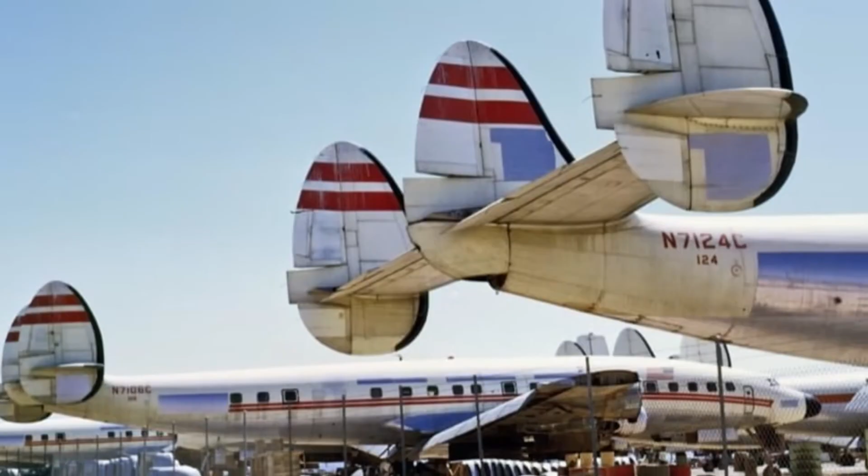As the years passed, the parts supply began to dry up. Curtiss Wright was no longer pouring new cylinder heads or forging new master rods at scale. To keep the aging cargo planes in the air, freight operators had to cannibalize dead engines. In aircraft boneyards across the American Southwest, mechanics stripped parts off abandoned Constellations, salvaging carburetors, oil pumps, and cylinders just to build one working engine out of three dead ones.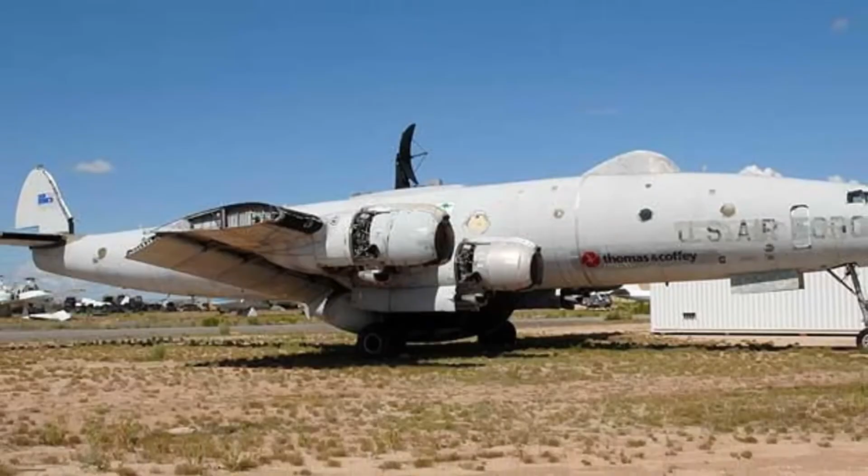Curtiss Wright tried to pivot, but the momentum was gone. Without a flagship commercial turbine to compete with Pratt & Whitney or General Electric, the Wright engine empire was effectively locked out of the future it had helped create. To survive, the corporation did what many American industrial giants do when their primary product becomes obsolete. They diversified. They stopped trying to be the premier builder of aircraft engines and became a supplier of aerospace components. They built flight control actuators, high-tech metal extrusions, and industrial systems. The corporate entity survived. The balance sheet stabilized. But the mechanical identity that had started with a 9-cylinder Whirlwind crossing the Atlantic was gone.

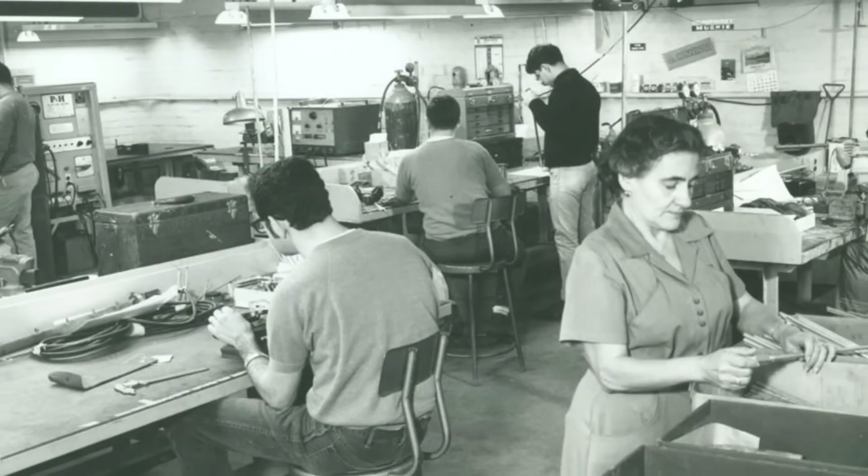The Wood-Ridge plant, once the beating heart of American aviation manufacturing, slowly wound down its engine operations. The sprawling test cells, where the Duplex Cyclone once shook the concrete with thousands of horsepower, went quiet. The highly skilled machinists either retired or moved to other industries. The physical footprint of the factory was eventually repurposed and partially demolished. A massive industrial ghost town left behind by the speed of technological change.

The Wright radial engine did not fail because it was poorly designed. It failed because it had succeeded so completely at pushing the internal combustion engine to its absolute physical limit that there was nowhere left to go. It had solved the problem of moving heavy loads through the sky, but it could not solve the problem of its own complexity. It was defeated by a machine with one moving part.

The transition left a strange silence on the flight line. The engine still ran. The orders slowed. The airlines moved on. The parts became salvage. The mechanics retired. The factory lines stopped. The roaring sound faded. The badge remained. The sky it conquered belonged to someone else. But in the American sky, old iron takes a long time to fall completely quiet.

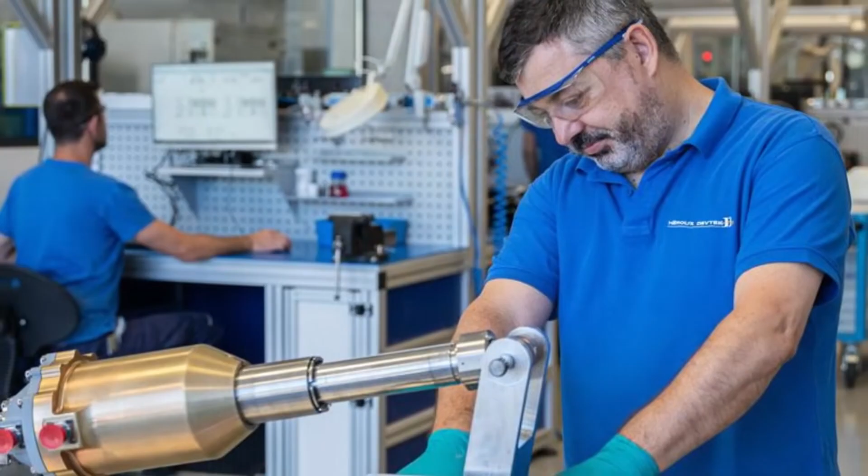Curtiss Wright did not go bankrupt when the last R-3350 Duplex Cyclone rolled off the assembly line. A massive industrial corporation rarely dies overnight. It simply changes what it sells. Curtiss Wright pivoted away from the grueling competition of primary propulsion. It became a highly diversified aerospace and industrial supplier, building flight control actuators, advanced metal coatings, and specialized mechanical components. The corporate entity survived the collapse of its piston empire and remains in business today, a quiet giant in the background of modern manufacturing.

But the deep irony, the surprise footnote to an entire century of aviation, is that the company bearing the name of the Wright brothers, the very men who invented powered flight in America, surrendered its engine empire because it refused to invent the American commercial jet engine. They bought British designs, played it safe, protected their balance sheet, and watched Pratt & Whitney and General Electric conquer the global sky. The brand survived, but the identity of the Wright engine, the roaring heartbeat of American aviation, was lost.

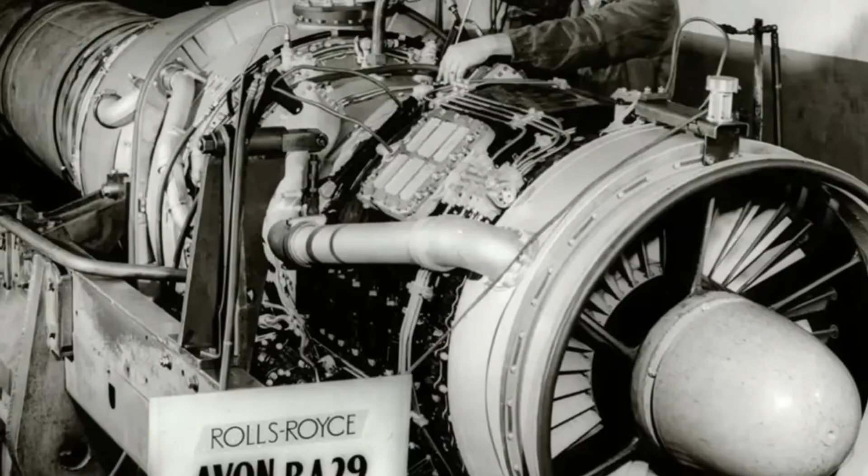If you visit Wood-Ridge, New Jersey today, the physical memory of that empire is mostly gone. The massive manufacturing footprint, where tens of thousands of men and women once cast aluminum cylinder heads, machined master rods, and heat-treated aerospace steel, was eventually sold off. Much of the site was repurposed or demolished to make way for commercial retail, transit centers, and residential development. There is no longer a deafening roar shaking the ground from the heavily reinforced test cells.

The aerospace city that built the mechanical foundation of World War II and the golden age of transcontinental air travel has been replaced by the quiet, ordinary convenience of modern suburban geography. The industrial knowledge, the generational ability to cast the perfect cooling fin or balance an 18-cylinder crankshaft by hand, scattered and slowly aged out of the American workforce. But the engines themselves refuse to disappear completely.

Old iron is stubborn. Across the United States, a dedicated preservation and enthusiast community keeps the Wright radial engine alive. At events like AirVenture in Oshkosh, Wisconsin, or at regional air museums and restoration shops scattered across the Midwest and the Sun Belt, you can still hear the distinctive, tearing roar of a Wright Cyclone.

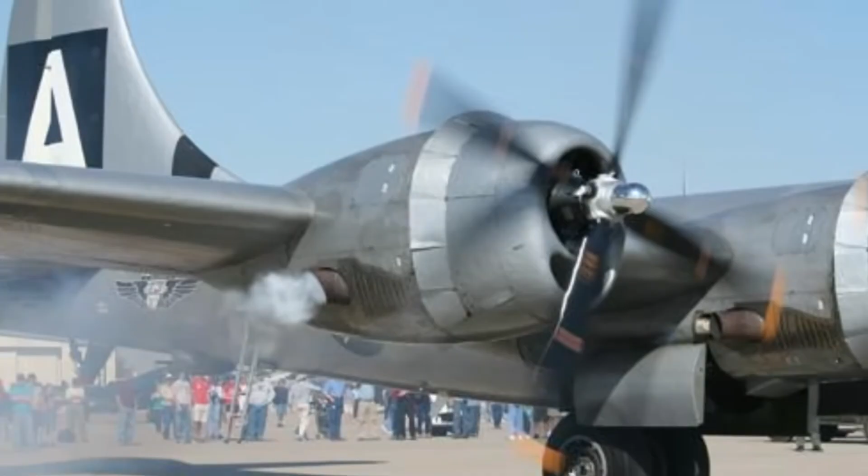Restored Boeing B-17 bombers, North American B-25 Mitchells, and the incredibly rare surviving B-29 Superfortresses, like the famous warbirds Fifi and Doc, still rely on massive Wright radial engines to leave the runway. When a B-29 starts its four R-3350s on a modern tarmac, a massive crowd always gathers, drawn by the thick clouds of blue oil smoke, the uneven, hammering idle, and the violent vibration that shakes the ground. This is not simply nostalgia.

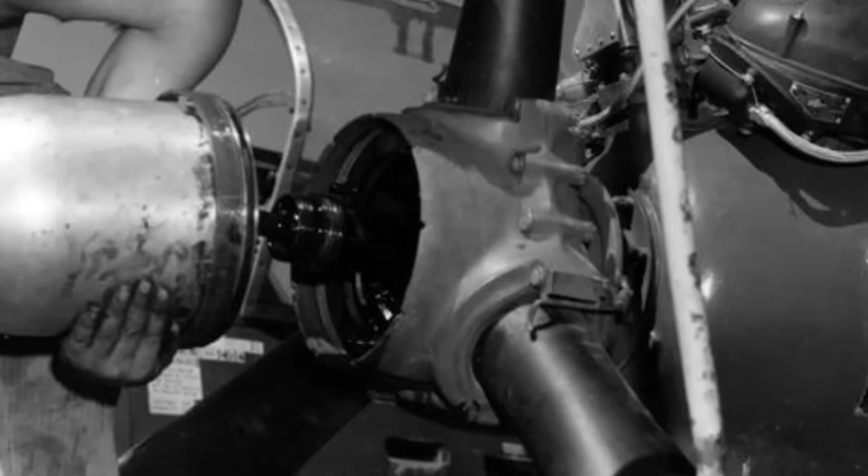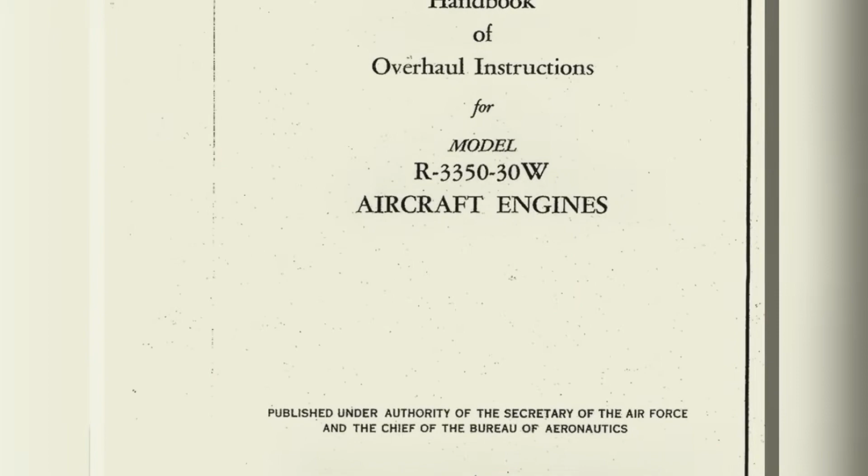A running Wright R-3350 under a museum spotlight or strapped to a restored aluminum wing is not just a romantic reminder of the past. It is a physical, working argument about the absolute limits of engineering. It proves that there was a time when American industry believed the solution to needing more power was to simply add more moving parts, machine them to tighter tolerances, and force a blue-collar workforce to master the resulting chaos.

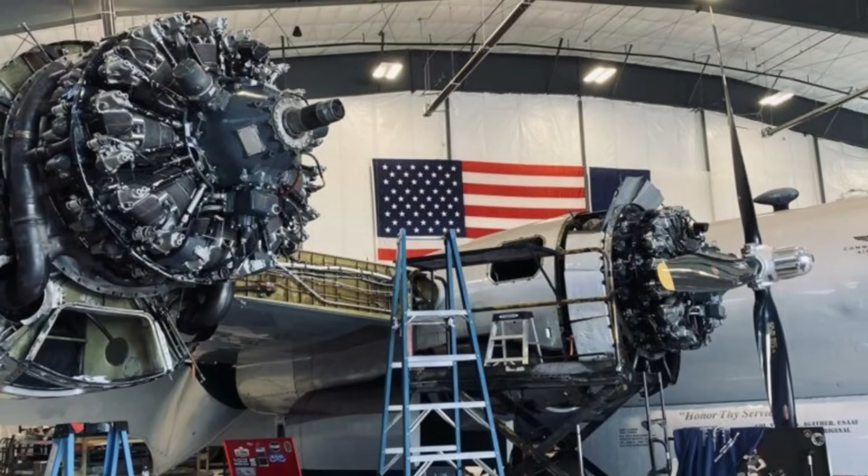To keep these flying relics in the air today, a small, highly specialized group of mechanics must operate exactly as their grandfathers did in the 1940s and 1950s. They still rely on heavy, oil-stained Curtiss-Wright service manuals, books that dictate exactly how to safety wire a critical nut, how to read the burn pattern on an aviation spark plug, and how to manually pull a massive metal propeller through its rotation on a cold morning to clear pooled oil from the bottom cylinders before hitting the starter.

Finding replacement parts requires scouring old salvage yards, trading with other museums, or custom machining new components from original blueprints, because the factory support network vanished decades ago. The existence of these engines today reminds us of the massive physical labor it took to make early commercial and military flight possible. The jet engine, the turbine that ultimately destroyed the Wright radial, democratized air travel because it was overwhelmingly reliable, clean, and required a fraction of the maintenance.

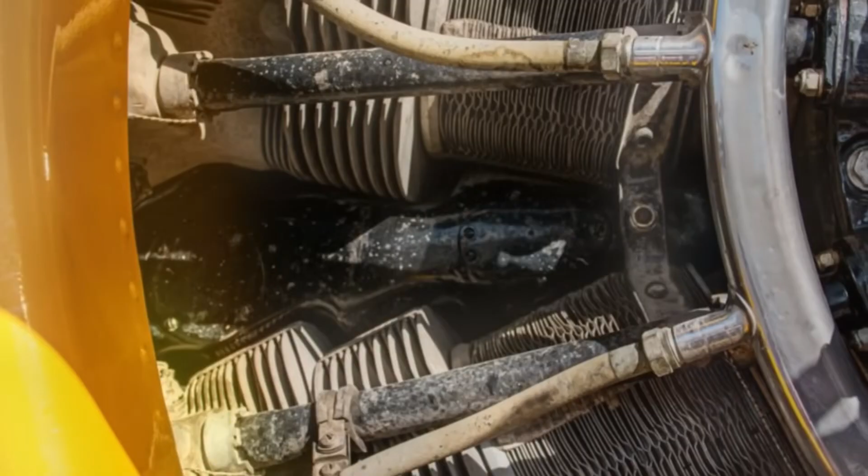But the modern jet engine is a sealed system, a quiet, hyper-efficient black box of physics that most passengers will never see inside or mechanically understand. The radial engine was deeply, unapologetically honest. You could see the push rods moving. You could see the deeply machined cooling fins. You could smell the burning aviation oil. You knew exactly how hard the machine was working to keep you in the air, and you knew how much human labor it took to keep it from tearing itself apart.

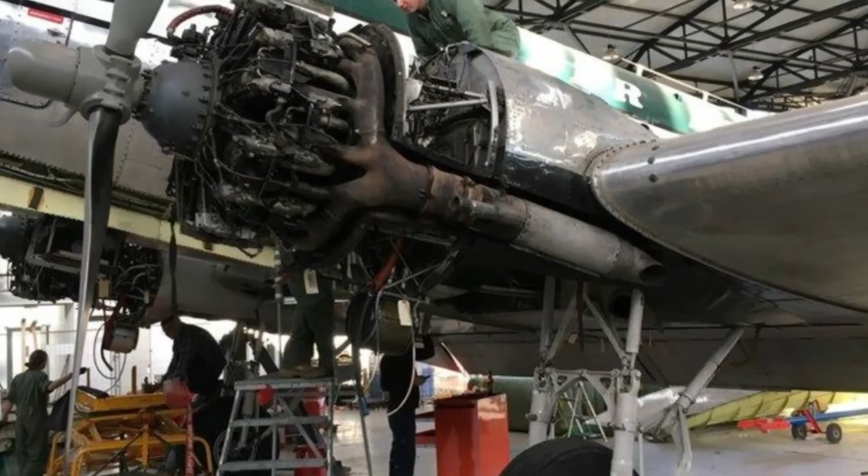America did not stop needing heavy lift, transcontinental speed, or global reach. It simply stopped needing the kind of mechanical complexity that required 18 pistons, 3 power recovery turbines, and gallons of oil to achieve it. The Wright radial engine empire did not fail because it built a bad machine. It reached the absolute ceiling of what an internal combustion piston engine could do, and then it was forced to step aside for the future.

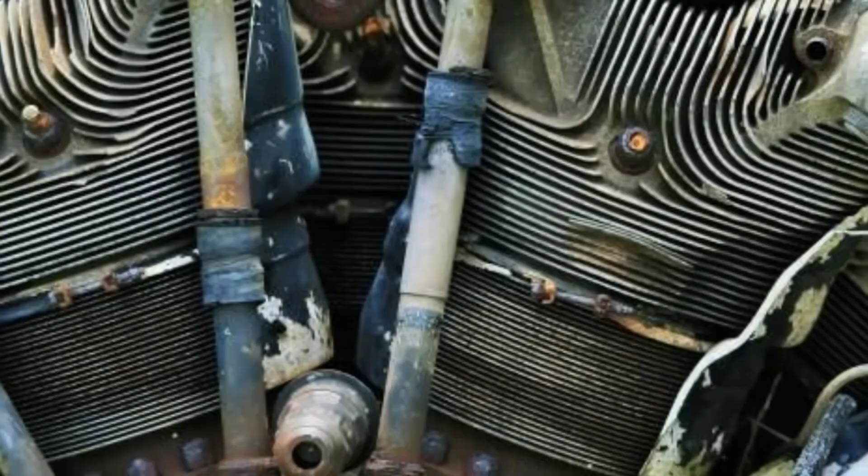Somewhere in an American hangar tonight, the heavy steel doors are rolled shut. Sitting over a drip pan on a concrete floor is a massive, multi-row Wright radial engine. Its aluminum cooling fins scarred by heat, its push rod tubes coated in a thin film of aviation oil, waiting for a mechanic to turn the propeller by hand, a sleeping giant of cast iron and aluminum that still remembers how to make the ground shake.